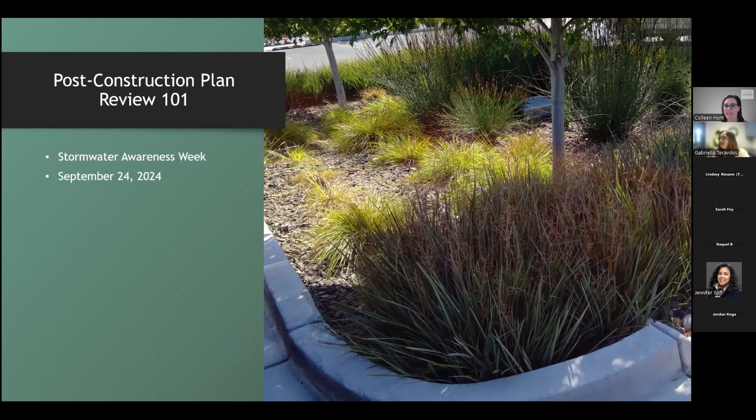Thank you. My name is Colleen Hunt with Stone Creek Environmental Consulting. I am located in Windsor, California, about 60 miles north of San Francisco. I have 25 years of experience in water quality regulation, including working as a regulator for 18 years for the state of California, and I've been a consultant for the past 7 years. So thanks for joining us today.

I have a certain passion when it comes to post-construction and really making these requirements very viable. We put a lot of resources into post-construction, and I think it's a really important element to our programs for water quality benefit. So I'm very happy to be here to provide this workshop today.

As it says in the title, this is Post-Construction Plan Review 101. It's really going back to basics, not necessarily intended for an advanced audience. My intention is to review some fundamental areas for plan review, looking at some things from an elementary standpoint. So if you're new to plan review, this will be a great workshop for you.

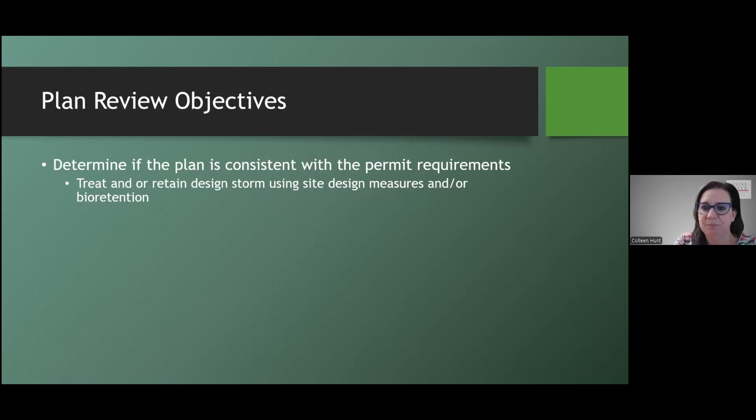I like to start out all my trainings with reviewing terms and definitions. I think that as these requirements have evolved, there are some terms that are used interchangeably, and they have maybe subtle differences, but they do have differences. As a plan reviewer, I'm kind of a stickler for these differences. I'll kick a plan back to the designer if they're not using the terms in the right manner. I also feel like when you're doing a training, we all need to be on the same page about what these different terms mean.

Post-construction is a very broad term that really refers to the implementation of control measures to reduce the discharge of pollutants from the municipal separate storm sewer system, which receives discharges from new areas of new development and redevelopment projects. Basically, post-construction is looking at controlling pollutants in a development or redevelopment project using some type of best management practice.

So this is broad, right? And we're going to talk about the definition of low impact development next, but post-construction could refer to a variety of different BMPs, best management practices. This could be an oil water separator, which is not LID. It could be other implementation measures like labeling storm drains with a medallion that says 'drains to a creek or the ocean,' right? So very broad, some type of BMP to reduce pollutants in stormwater runoff.

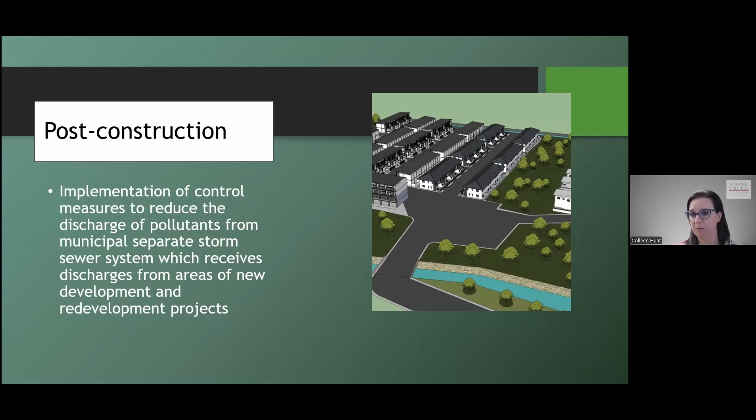As I said earlier, a lot of these requirements, at least in the state of California, I'm not sure about other states, have evolved to require low impact development. This is the concept of trying to maintain that natural hydrology, treating pollutants with landscape-based BMPs, with the goals of capturing, treating, infiltrating, filtering, storing, evaporating, or retaining runoff from a given storm event. Different permits have different requirements. I know I work with some permits where there's a retention requirement, so you have to design your BMPs to retain a certain amount of water. Others are treatment-based, or some type of combination.

So LID, particularly, we're going to be focused on bioretention today, can accomplish a variety of these requirements, but ultimately bioretention is usually selected for retaining a certain amount of water during a particular storm event.

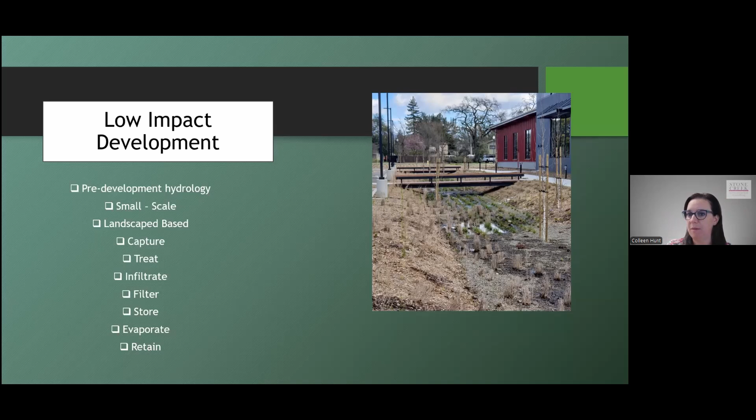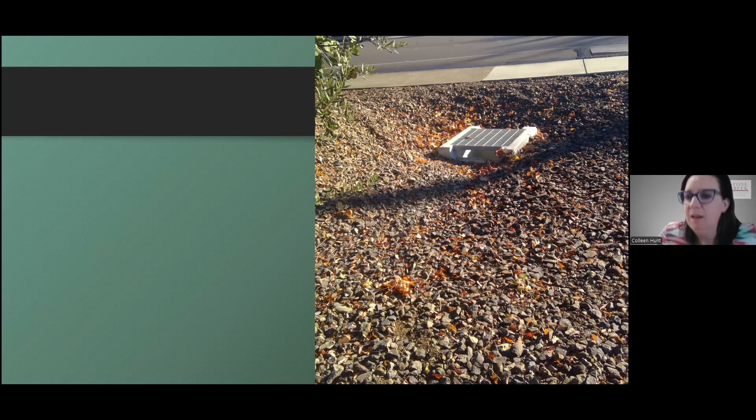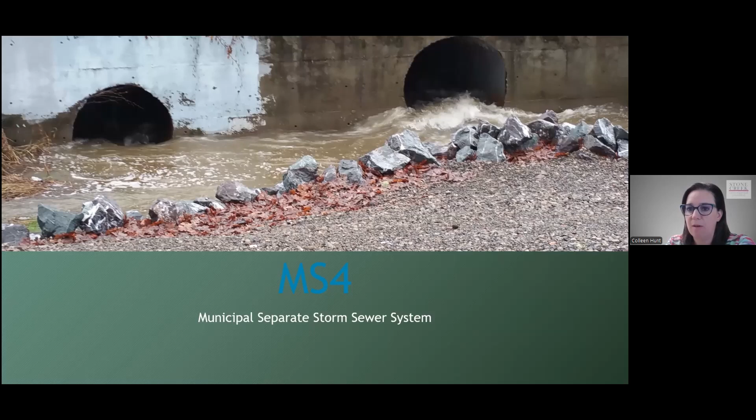MS4, Municipal Separate Storm Sewer System—just want to define the acronym. This is referencing municipalities who have stormwater infrastructure that drains directly to some type of water body. It does not go to their wastewater treatment plant, and so therefore the water is discharged without first being treated unless there's a BMP.

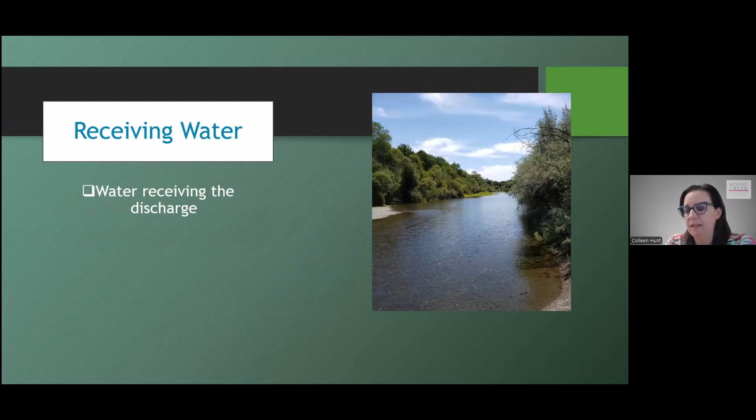Receiving water—I may refer to receiving water, which is basically where the stormwater is discharged to.

Retention versus detention. I do see these terms used interchangeably, and there is some subtle differences. With a retention basin or a retention requirement, we're really looking at holding water on site, a certain volume of water, and designing a BMP that will retain that amount of water on site. Whatever's retained there therefore doesn't discharge to the MS4 or receiving water.

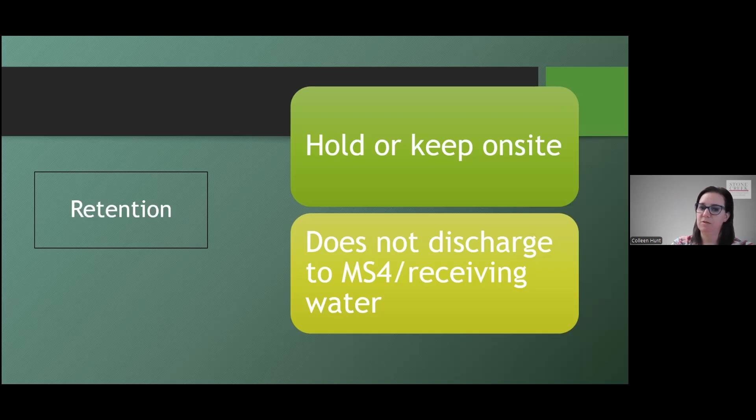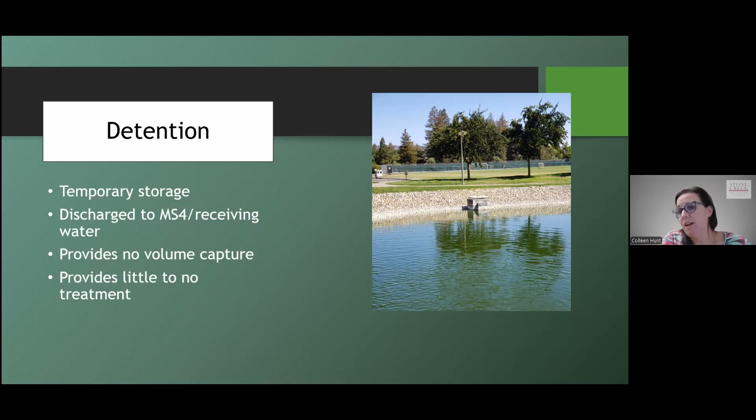I think we've evolved—some detention basins are being developed with low impact development in mind so that they're not concrete lined. So whether we call that a detention or a retention basin may depend on the actual purpose it's designed for. But in LID, I get plans sometimes that say, well, we're going to put a detention basin in as our BMP, and I work with permits that prohibit detention basins for LID compliance. So then it's like, well, do you really mean retention? Otherwise I'm going to have to kick back your design because you're not going to meet the requirements of the permit.

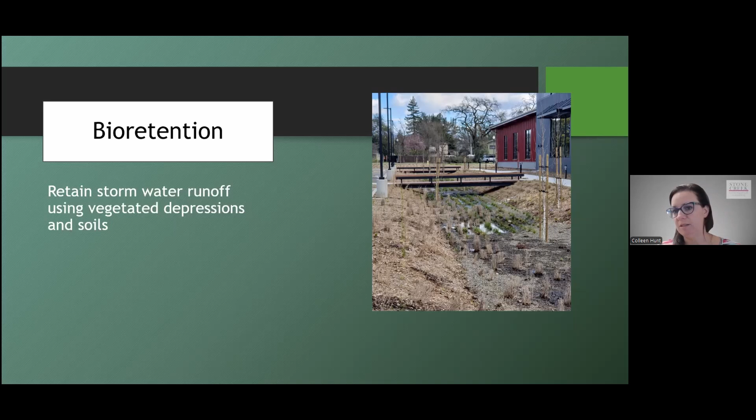Again, I see these terms all used interchangeably, so I just want to make sure we're on the same page on what these different terms mean.

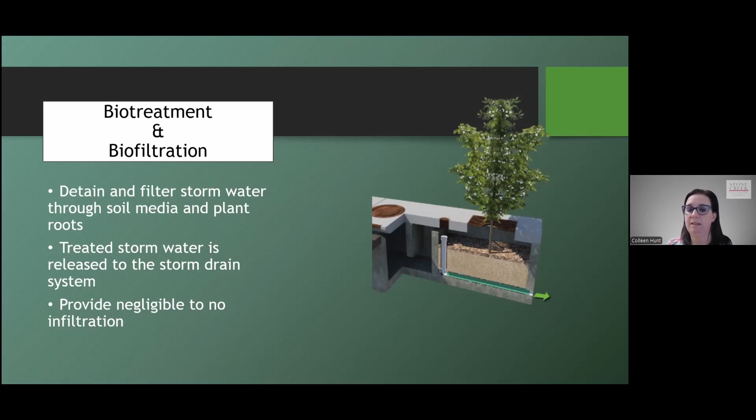Then there's a bioswale, which technically can be designed as bioretention, but usually refers to something in a linear path, your BMP. You could have a bioswale that doesn't meet a retention requirement. So you really have to have a design standard so you understand what the BMP is accomplishing.

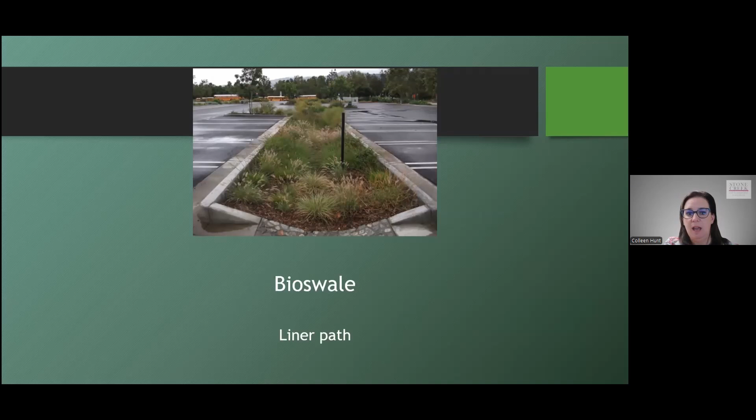And then finally we have rain gardens. In some of the LID manuals or design standards I work with, rain gardens really have a bioretention component. They have the engineered fill, they have the vegetation, but they're usually very small scale - looking at draining less than an acre of impervious area, with these more small scale designs.

So you can see it's a fine line between these different terms. But I reviewed a plan once where they had used the rain garden design standard for a tributary area that was over 7 acres. It doesn't match up, right? What they really had was bioretention, but they had submitted the rain garden design standard. So again, I'm a stickler for terms and really having an understanding of what you're proposing - what is the real requirement and objective. Something to keep in mind when you're reviewing plans.

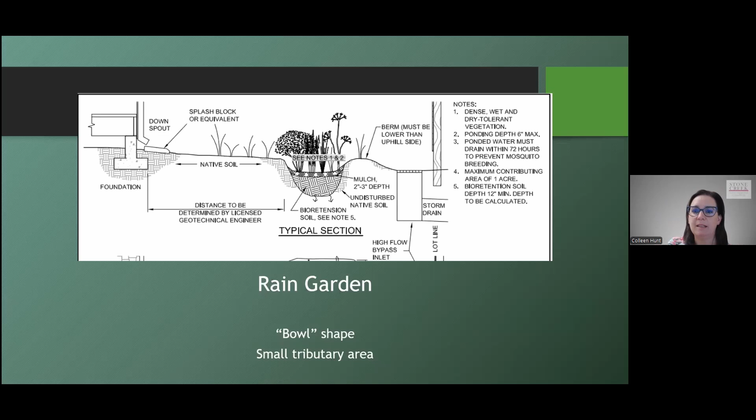Okay, so that gets us through some of the terminology - I gave you all my disclosures. But as we move forward with this workshop, I had to have some point of reference for plan review to give information that makes sense.

So I'm basing the remainder of the presentation off the requirements within the State of California's small MS4 permit. This is a general permit available to municipalities under 100,000 in population that are not required to enroll in an individual permit - there are a lot of small municipalities in California that are in regional permits. Essentially we have requirements in our permit to have LID conditioned on development and redevelopment projects.

Most municipalities put together some type of manual to present to the regulated community what the expectations are in terms of project design. In this particular example, what needs to be submitted is a stormwater control plan that details how this project is going to meet the LID manual and ultimately the permit requirements.

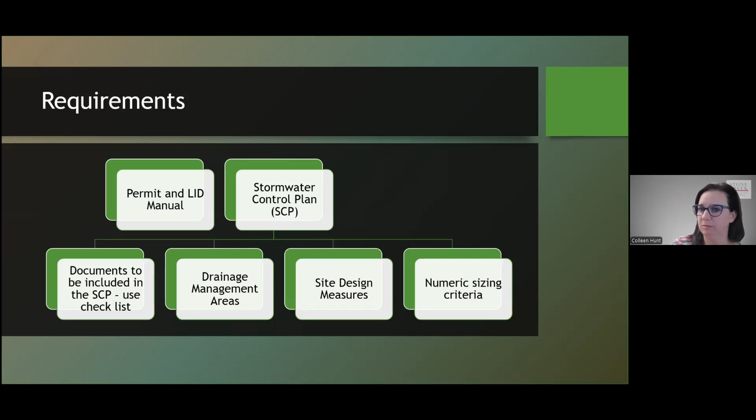There's essentially 4 components to the stormwater control plan. There's a checklist that says here's all the things you need to provide a complete submittal to the municipality. We want to see drainage management areas - and I'll get into each of these in more detail - site design measures, and your numeric sizing criteria. We'll break that down as we move through the training.

So the first thing I think is really important is, do you have, as a plan reviewer, some type of submittal checklist - something that guides you to know whether or not they have a complete package. It doesn't mean their package can be approved just because they have every component, but it's guidance for you as a plan reviewer to cross-reference to make sure they have everything required before you start to review.

I know I work with some permits where this is a requirement, and the MS4 permittee could actually be audited by the state regulator, who could ask to see your plan review checklist, and they would have to provide that checklist to demonstrate compliance with the permit. So you may be mandated to have this.

And even if you're not, it's a good idea. There's lots of references and resources out there to help you if you don't have one and you are mandated to do these plan reviews.

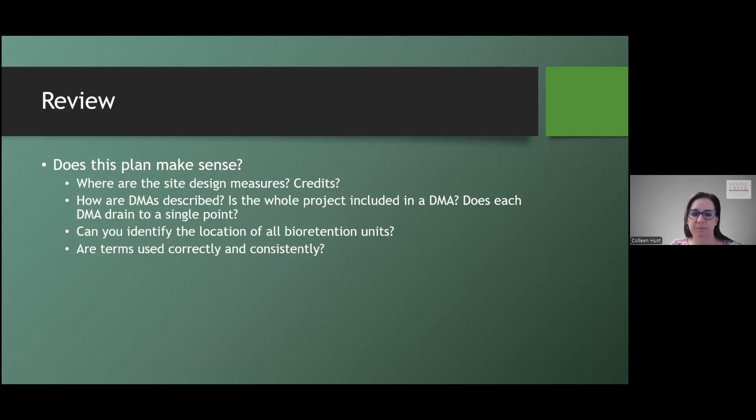So here is a plan, and could I get a thumbs up if you could see my cursor? I don't know if that translates. Okay, thank you.

So this is what I'm going to do today, to show you, to walk through a plan review, is an example project. This is an In-N-Out Burger. And for those of you from the West Coast, this is kind of an iconic burger restaurant, fast food restaurant in the West Coast. Anyway, so we have their site plan.

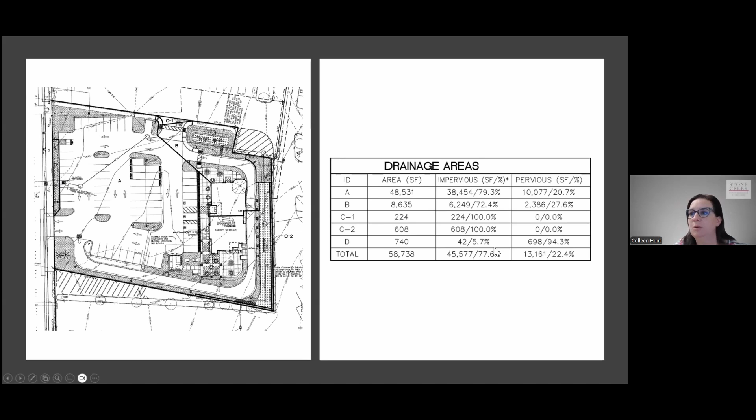So just a little bit about this project: this is a redevelopment. So this was a demolition of an existing building, and they're going to construct a 3,867 square foot restaurant with a drive-through lane, parking, and landscape. The project size is about 1.35 acres. The area of new or replaced impervious is 1.05 acres, and the area of pervious is 0.30 acres.

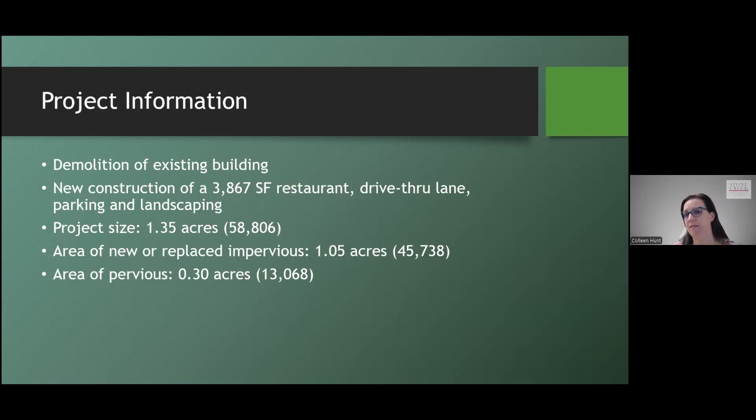So again, we've got our 5 drainage management areas. Here's a little color coded chart where I highlighted the BMPs. So I've got A and B drain to BMPs, C1, C2, and D do not drain to BMPs.

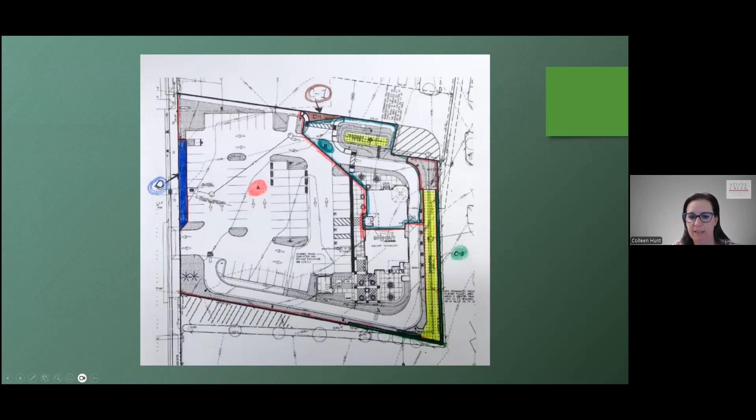So their BMPs are provided in a chart in terms of some specific information that's required, which includes the drainage management area, square footage, the runoff factor. So this is used to calculate the volume of water that needs to be, in this example, retained.

The minimum facility size, so this refers to the BMP's square footage in order to meet the volume retention requirement, and then the actual size. So they're oversizing 2 of their BMPs.

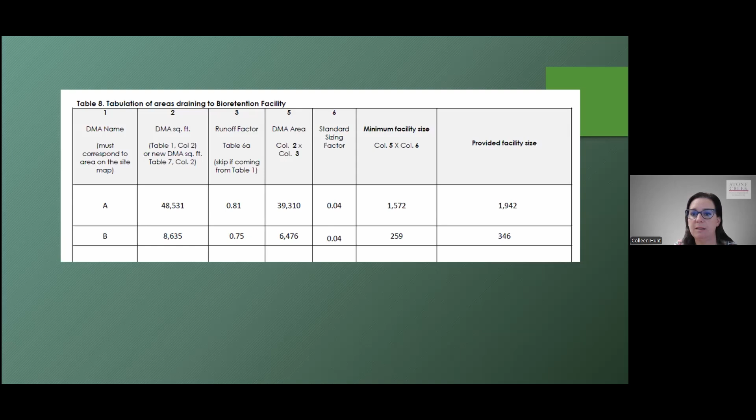So as I go through and review this project, I'm going to make some notes. So my first note is going to be 5 drainage management areas, but only 2 draining to bioretention. So what are we doing with the other 3? And I'll note that the oversized BMPs, those are a red flag.

And while this is going to be kind of permit specific, oftentimes you can oversize BMPs for retention purposes. You may not be able to retain the appropriate volume of water for every drainage management area, but all runoff

usually still needs to be treated. So when we think about those C1, C2, and D areas, looking at well, is there still a treatment component, even if you've oversized other BMPs, so you're retaining a volume of water relative to the whole project, we still need to treat all of our runoff. So that's something I'm going to think about while I'm working through this review.

Okay, site design measures. Probably should have defined these earlier in the training, but these are usually credits that are given to a project to reduce the volume of water that needs to be treated or retained.

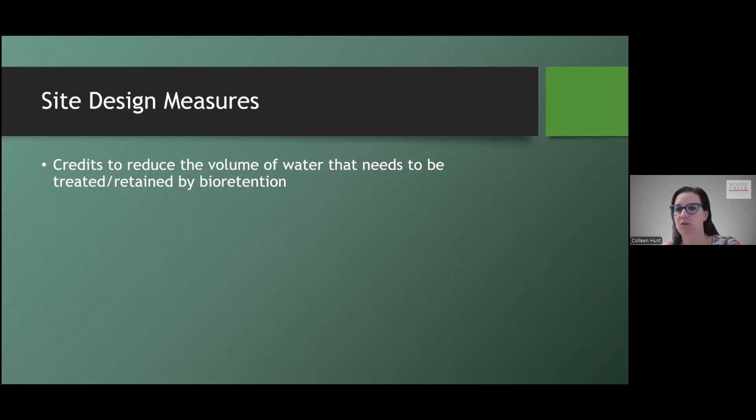And I'm going to give you an example, but the types of site design measures we see can be stream setbacks and buffers, soil quality improvement, tree planting. The most common is disconnected impervious area, so like a roof disconnection.

So instead of plumbing the roof runoff to a pipe that ultimately carries that runoff to a storm drain, it's somehow retained on site. And if you can retain that on site in a vegetated area, you can take that amount of impervious surface and subtract it from your overall calculations of the volume of water that you are required to retain. So most MS4 permits, at least in the state of California, have some type of crediting system to encourage these types of practices in development.

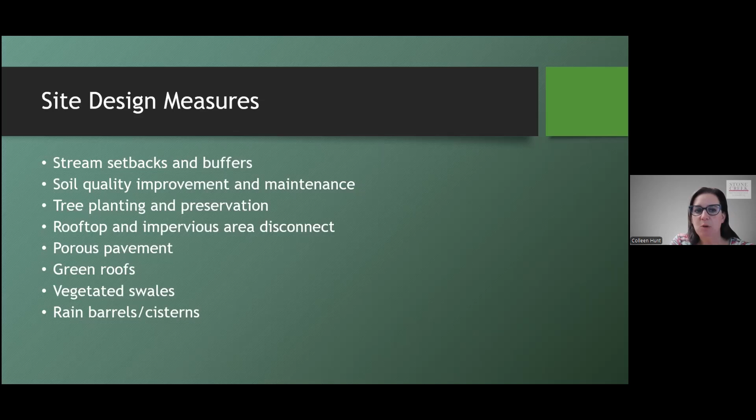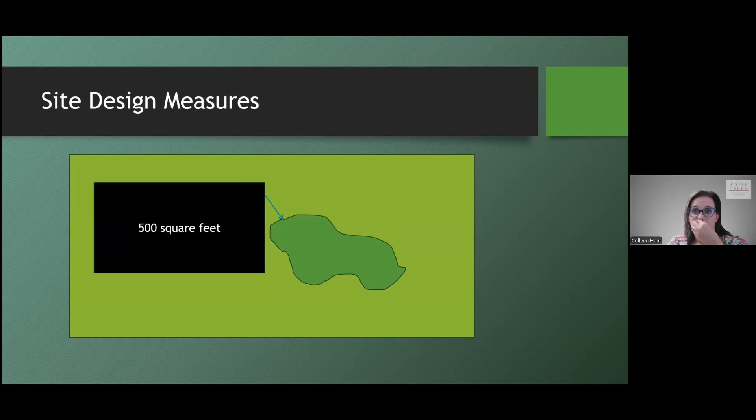So I'll go through a quick example. Let's say you have a project and you have 500 square feet of impervious surface. Normal circumstances, you would have a pipe that sends that out offsite to a storm drain. Let's say instead you send that water, or some percentage of the water - it's not an all or nothing - that you create a depressed vegetated area that can hold a certain amount of water.

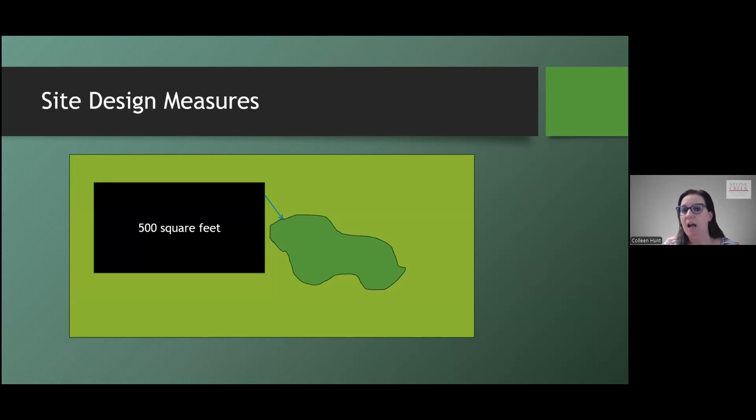Now you can direct that to this area, and whatever percent of this square footage that is directed to the landscaped area can then be provided as a credit to reduce the amount of water you have to retain with bioretention. So if you don't have this crediting system as part of your program or permit, you can kind of disregard this, but I think because most in California do, I wanted to include this as something that we look at.

And so for this project, the narrative talked about a rooftop and impervious area disconnection. And so they were going to direct some percentage of their rooftop runoff to a depressed vegetated area. So separate from bioretention, right?

So they were going to divert, if you will, their roof runoff to somewhere else on the facility to prevent it from going to the storm drain system without having it to be part of the sizing calculation for the bioretention.

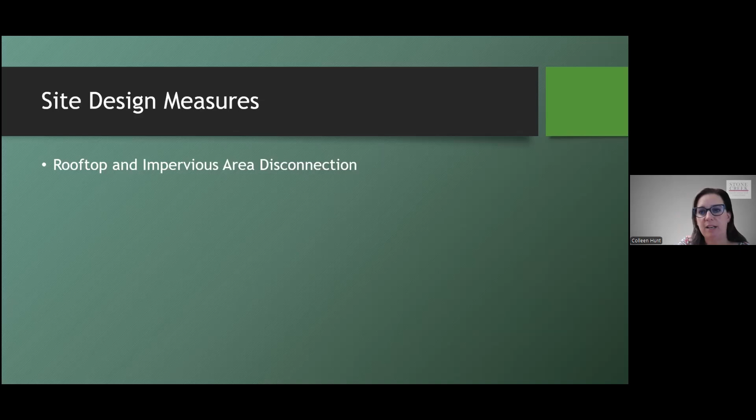But then when I looked at this, there's a table in the template for the stormwater control plan where you put in your credits. And so you basically put in, okay, in this drainage management area, we're going to take this much rooftop impervious and direct it to this landscape area.

Something to note: what did you mean to take the credit? It's the design, it's the advantage of the project to take those credits. I wouldn't necessarily not approve a plan that said they were going to take a credit but then didn't, but there's an inconsistency there.

Sometimes I think that's the intent, so the narrative gets written. Then when the actual design occurs, they're like, well, we can't do that because we can't get that depressed area to meet the requirements for how these site design measures have to be designed. So we'll ditch that, and then they forget to update the narrative, maybe.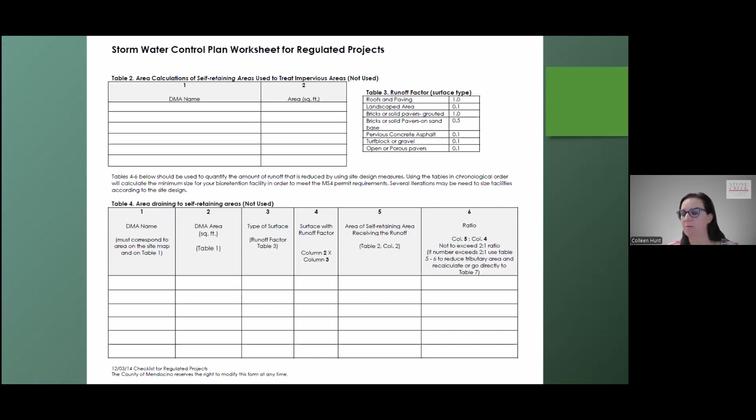The overall point is, if you do have a crediting system, making sure you look at that and that it's accounted for appropriately based on whatever site design measure they've selected. So I'm just going to add to my notes that they selected the impervious area disconnect but didn't include the credit. I might not say anything about that, but I'm just going to note it.

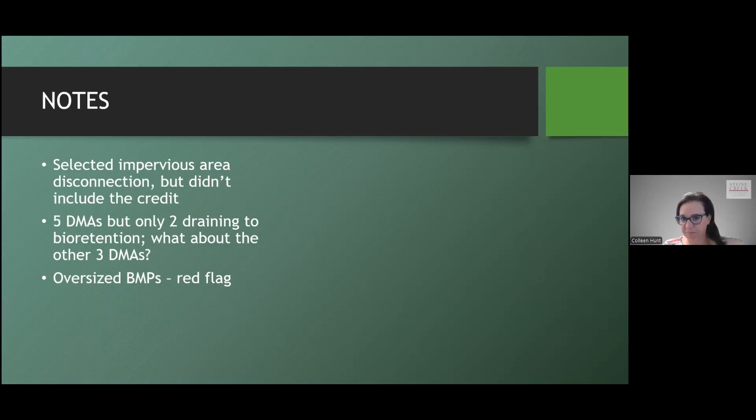Okay, now we're going to look at the drainage management areas, where we're trying to see: do they drain to a single point? Do they drain to a BMP, a bioretention? Do we have a good grasp on the treatment or retention, how they're meeting those requirements?

We're not looking at the engineering calculations. We're just looking at their narrative and on their maps, can we determine that they're accounting for the treatment and the runoff retention that's required? Do they have the BMPs? Does it make sense? Okay.

Now, the other thing I do in a design review is look at water in, water into the BMP, water out of the BMP, and I do look at the overflow bypass elevation. Now, that might be going against what I said about not double checking an engineer's work. I'm going to show you some examples of why I look at the elevation of the overflow bypass.

Essentially, I'm not looking at the elevation to determine if it's enough difference between the lowest point of the BMP and that bypass elevation. I just want to make sure the bypass elevation isn't the lowest point in the BMP, which I see more often than not. I think that's evolved a lot since these were new requirements.

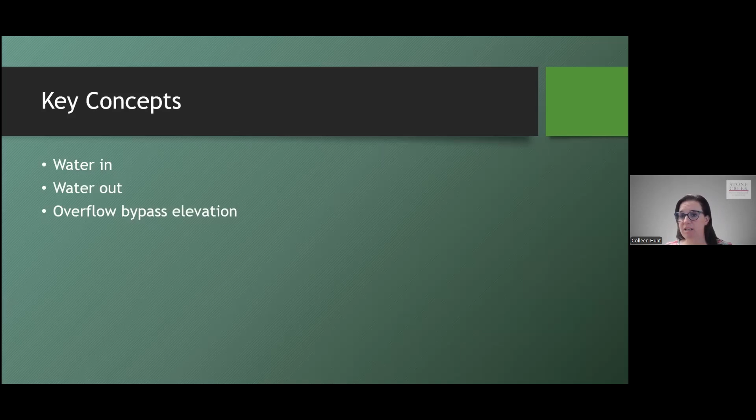Okay, so in the interest of time, I'm really going to fly through these photos. To be honest, doing this type of training in an hour is really challenging. I mean, LID in itself could be like a semester class at a university, so there's just so much to talk about, and to condense it all into an hour is really challenging.

So I'm going to move through these slides quickly, but you'll see some repetitive themes. Here, water is going into the BMP, but there's an outlet right where the water flows, so there's no retention, there's no treatment. I'll use the word fail - that seems harsh, but it's not a good design. This is why I like to look at the plans to see what the configuration is, because we need to avoid this - I see this a lot.

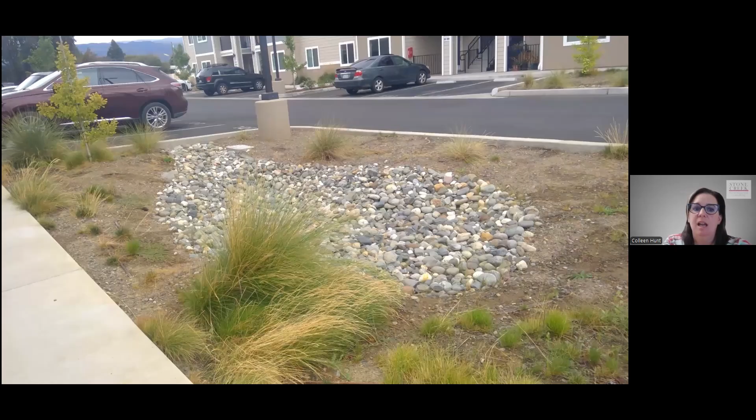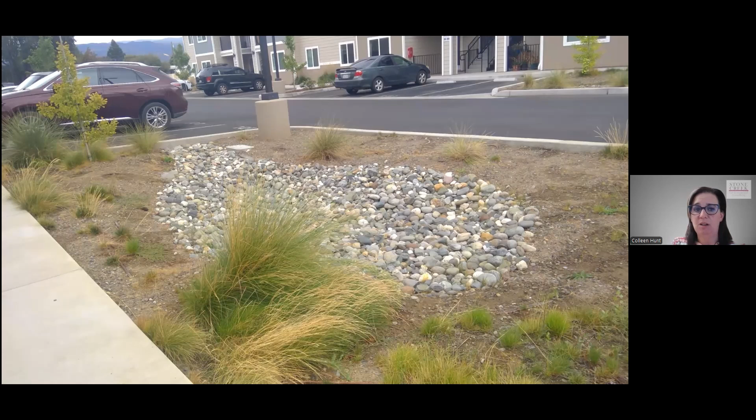This project was supposed to have a curb cut here, and this BMP was supposed to receive water from half of this parking lot. Whether this was an install fail or a design fail, I'm not sure, but it shows why we really need to know how the water is going to get into these BMPs. It's really important to make sure we have this understanding.

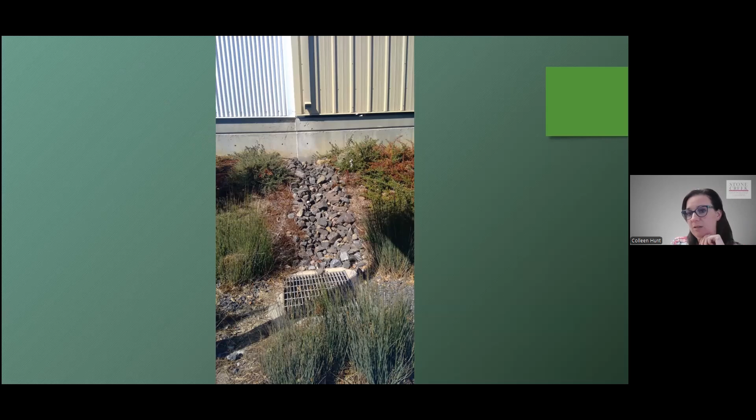So what I like to do is look at what's the plan to get the water into the BMP, and what's the plan to get the water that's above the design storm out. In our example here, the water is going in at this location, and there's rock, a dissipator to help with erosion, and then the water goes in and there's retention, and this is the outlet, and it connects into the city storm drain system here.

That seems logical to me. Remember one of my first slides, does it make sense? So this makes sense to me. If this drain outlet was over here, that might not make sense to me. If it's at the right elevation, it might work, but I just want a general understanding to make sure these things are being thought about with this design. Same here - this is the second BMP.

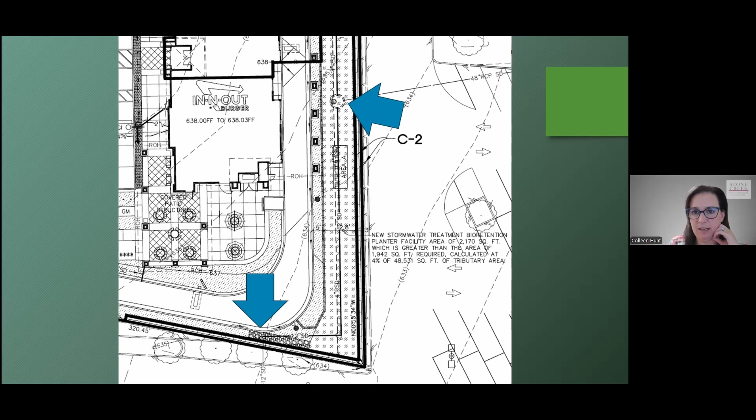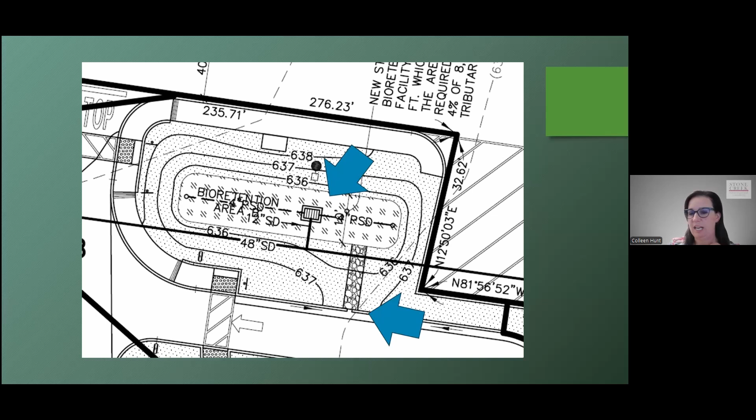We have water in, here is the drain outlet. Looking at the elevations, as long as it's not the lowest point in the bioretention, this should be an efficient BMP. So here's basically what we're looking for: a drain outlet that is at a higher elevation than the bottom of the BMP. What happens when it's at the lowest point? It becomes problematic for a lot of reasons.

This BMP is clogged with debris, which is a whole different issue. But when the outlet is at the lowest point, all the water is essentially going to flow to that point, and it may not receive the treatment that it needs, and it's definitely not going to have the retention requirement that's needed.

From there, I want to shift over to looking at the standards, so that whatever BMP is being provided in these plans, we want to make sure we have a design standard ensuring things like overflow, high flow bypass, correct elevations, engineered fill being proposed, and the vegetation. A lot of municipalities provide this to the design community to say please include this standard in your plans - this is the standard you have to meet to build these BMPs. Sometimes design engineers use their own set of standards, but we need some reference to the standards being used.

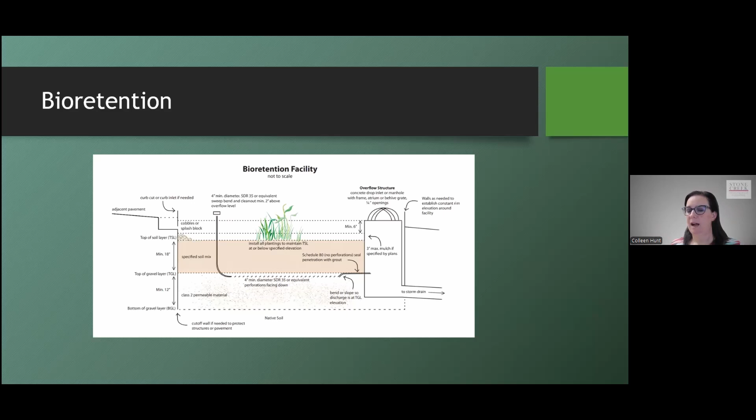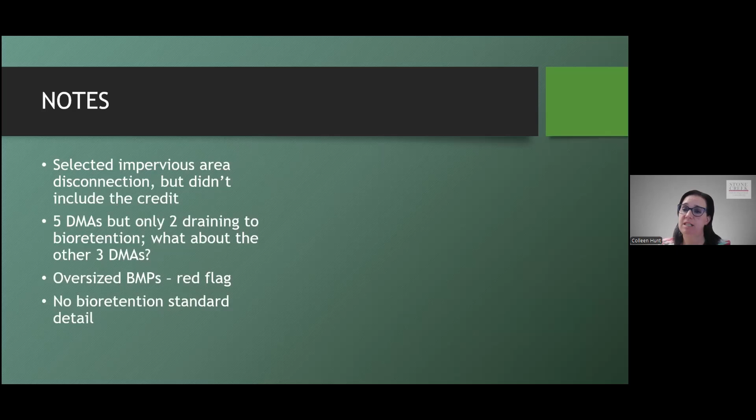I like to make sure that the standard, if it's not part of the municipality's LID manual, then we probably want to look into the standards to make sure it meets the intent of your municipality's requirements. I'll skip through that. In this particular example, they didn't have a bioretention standard detail, so that was a note that I made.

I want to talk also about vegetation. I mentioned this earlier, I showed you the rock garden infiltration basin. When we're talking about bioretention, vegetation is a vital component, and I think this is still evolving - there are challenges for sure. I can see why someone in the design community might want to do a rock garden, because establishing vegetation can be challenging. In California, we actually had some competing requirements with water conservation and establishing plants in bioretention.

So there are elements of the vegetation part being hard to manage, and the amount of water you need to establish it. What most bioretention standards say is that vegetation needs to be 51% covered in your bioretention BMP, and there are usually specifications on the types of plants you have to use - likely native plants. In California, we have a lot of drought tolerant plants, but it is a vital component.

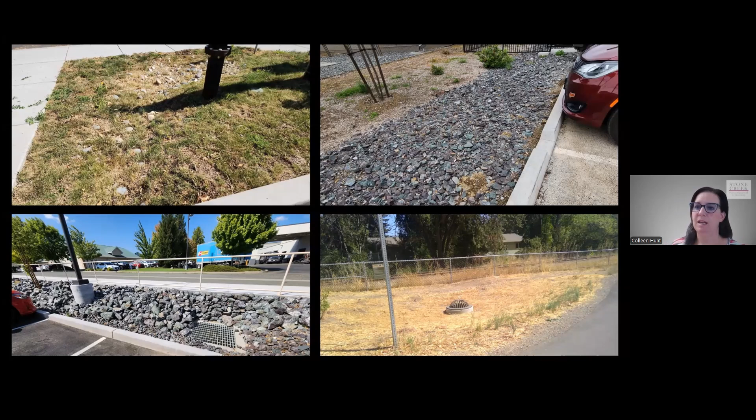You can see this has, maybe you can't see, but there's a lot of invasive species up in this unit. And so this is the type of thing that we need to avoid. I think it's really important when we're reviewing LID to have some verification of the vegetation that is going to be installed. So I'm going to give you an example of why I think this breaks down.

What I think happens in LID, and why I go out to a project and see all rocks and no vegetation, is because the landscaping design or plans do not get submitted as part of the LID design. And I think it needs to be part of that.

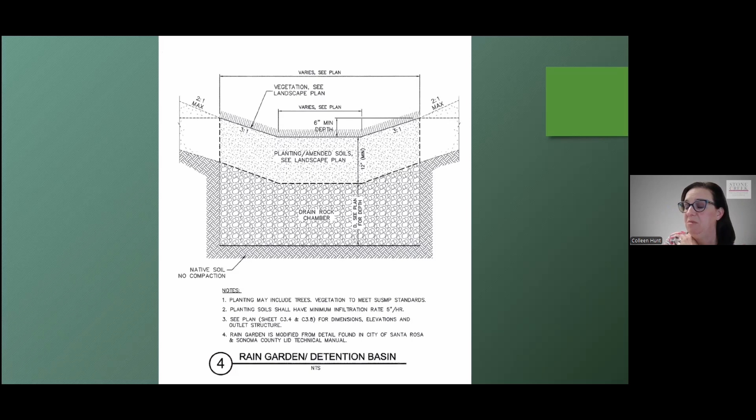Where I really see this occurring is, let's say plans go into planning and building, and then planning and building says, city engineer, here is your stormwater control plan to review for post-construction requirements. And the landscaping plan is still in the packet with the other components of planning and building's requirements. So what I see often is what gets submitted as part of LID or post-construction requirements is something kind of generic. We see that in the cross-section, in the standard detail - it just says vegetative component. It doesn't specifically say what the landscaping plan is going to be on a design detail.

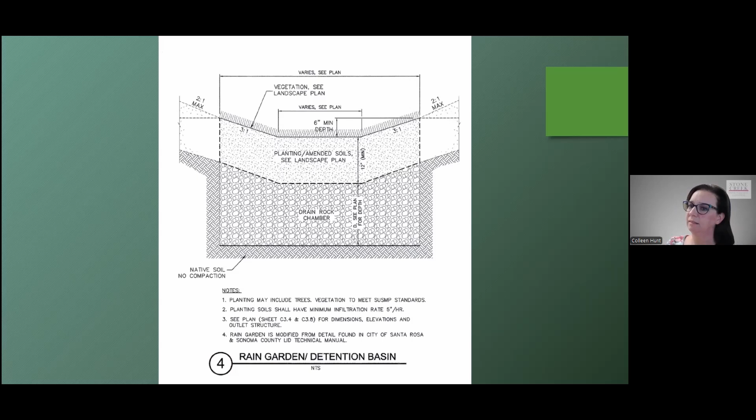So we look at what's being proposed in LID, and it just says vegetation, see landscape plan. And then we go over to the landscape plan, and there's no landscaping - it's rocks. And, oh by the way, they're going to put a filter fabric, which is going to prohibit potentially infiltration. In this particular case, the bioretention detail prohibits any kind of liner. So this didn't go to the city engineer. This is how the plan actually got installed, or the BMP got installed. And so you go out there and you're like, how did this happen? I backtracked, and it's like, oh, there's a disconnect between the landscaping plan and the post-construction requirements.

So I really recommend connecting those if you're responsible for plan review, because the vegetation is such a vital component. I'll just note that our local regulators are holding up termination of the construction general permit if bioretention is not installed correctly. Our regulators are actually going out to projects, and if they see these rock gardens with no vegetation, they will make you rip them up and put the vegetation in.

Again, as I said before, we don't want to have these conversations when these BMPs are installed. We need to make some efforts to make sure we're looking at these things up front so we can address them during the design phase, not after construction.

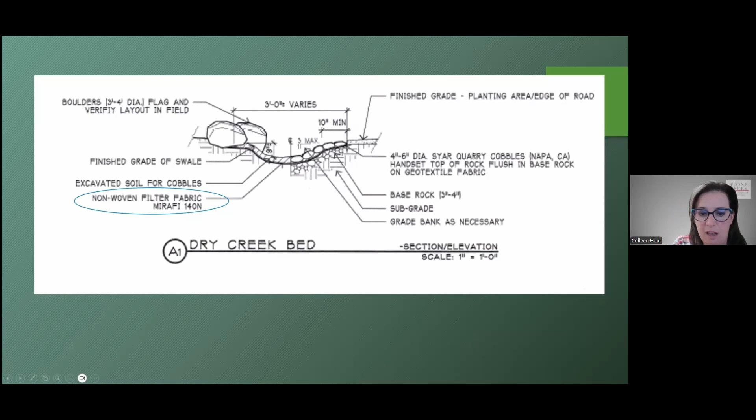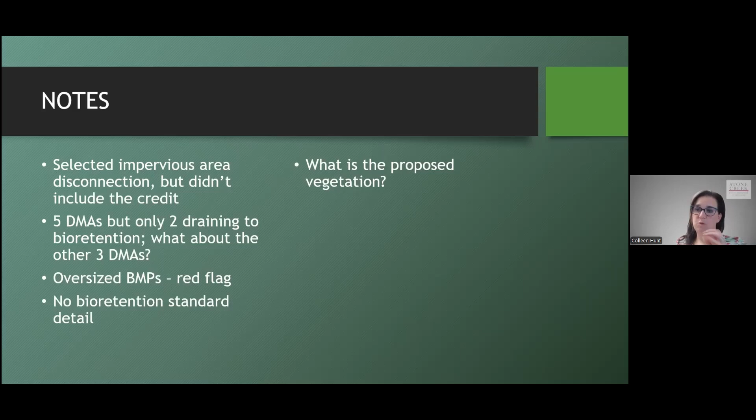Okay, I'm almost done, so I have time for questions. In this particular example, my question would be, what is the proposed vegetation? I want to know how are you going to vegetate this, so I can be confident that it's not just going to be rocks, that there's not going to be a liner - all these things that are vital to making sure bioretention is installed to the design standard.

I'm also going to make a mention about bark, and then I'm going to recap. Floatable bark is very problematic in bioretention or low impact development BMPs.

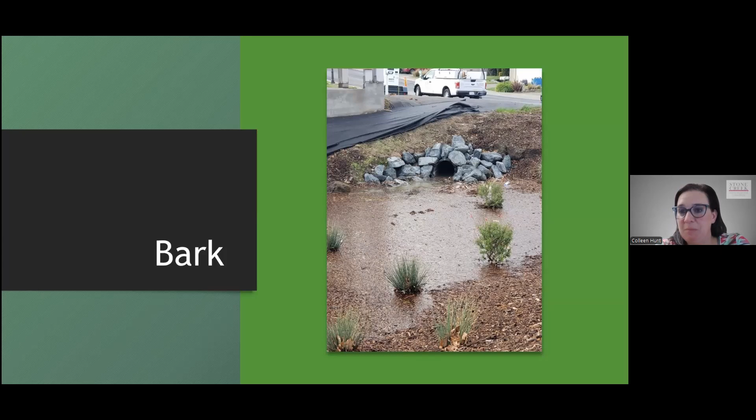I have had a project where the regulator saw that bark was installed and wanted it all pulled out. So after construction, it's all vegetated, it's all landscaped, and the regulator said, that's floatable bark - that's going to end up in the storm drain system and in the receiving water, and you have to pull it all out. So this is another component you want to be careful about - just verifying what is going to go into a bioretention BMP, and making sure that you're not going to be in this situation with the BMP failing at some point in the future.

So again, I have lots more to say on this, and because it's only an hour, I tried to cram as much as I could in. So hopefully you've gotten some useful information that you can apply to your plan review in the future.

Just to recap, I think the best thing you can do is use a checklist to determine if your project is complete. We're looking really - does your project meet your post-construction requirements, whatever those are, in that it treats and retains stormwater runoff? Do you have DMAs that are accounting for those drainage areas? Are we applying site design measure credits, and are we applying those appropriately?

How is the water entering the bioretention unit? How is the design storms larger than the required retention volume, how is that exiting the system? And then your bioretention details.

We want these bioretention units installed according to those standards, and making sure that is part of the plan, especially the vegetation. I did leave a few minutes for questions, so thank you for your attention.

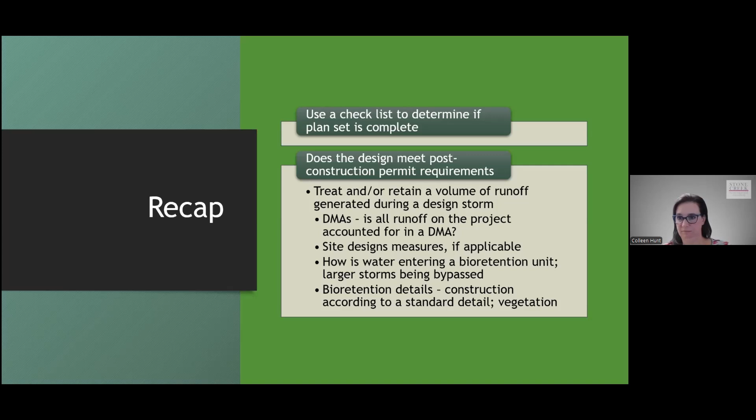Yeah, I see that a lot. You have a requirement now to meet the 100-year flood event, so you have to detain that so you don't get flooding wherever you're putting your project. But you also have a retention component. So what I've seen, where you try to do just one BMP, is a detention basin that has a retention component, so there's some level of infiltration, and you have the engineered fill to be able to retain at least your design storm. An engineer can look at what it takes to retain the required design storm versus the volume of water you need to hold during whatever storm event, like a 100-year event, to avoid flooding.

And then the difference could be released back out into the environment. I hope that answers the question. I believe it did.